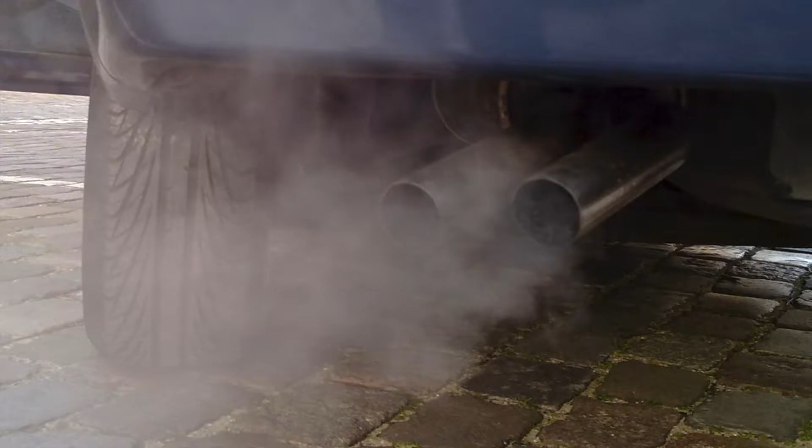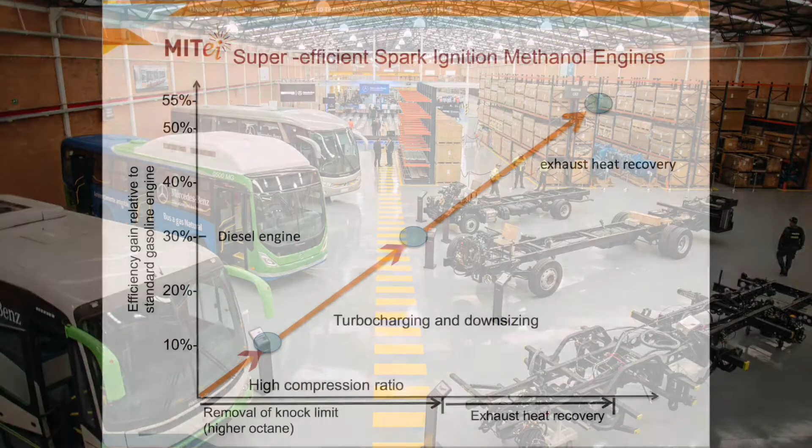Scientists from all over the world are working towards development of new technologies which can increase the efficiency and reduce emissions of engines, and use waste heat recovery for heating and cooling requirements of automobiles. Use of exhaust heat, which accounts for 30 to 40% of fuel energy, has been one of the priorities for many automobile technology developers. If this exhaust heat can be used for meeting the HVAC loads of the automobile space, then the efficiency of the automobile can be enhanced substantially.

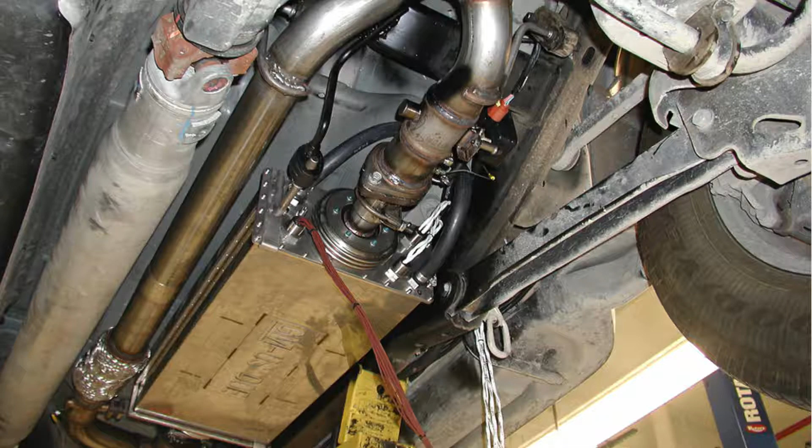Global leading research organizations are engaged in extensive research activities to develop technology to provide HVAC solutions using automotive engine waste heat. But these efforts have not been successful so far due to technological challenges and the complex, dynamic nature of the requirement.

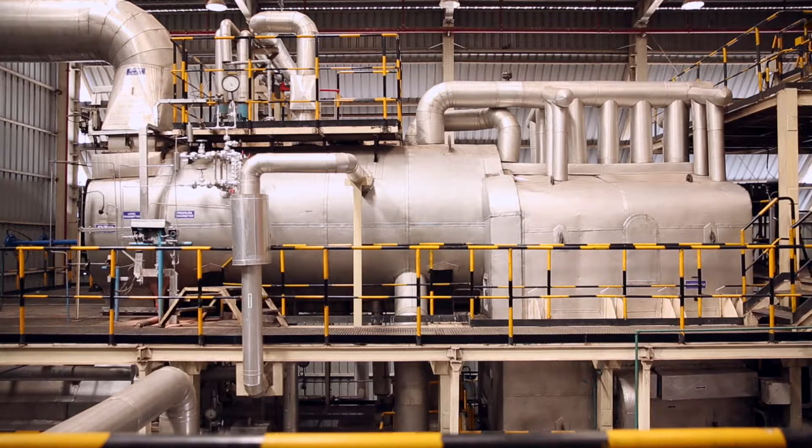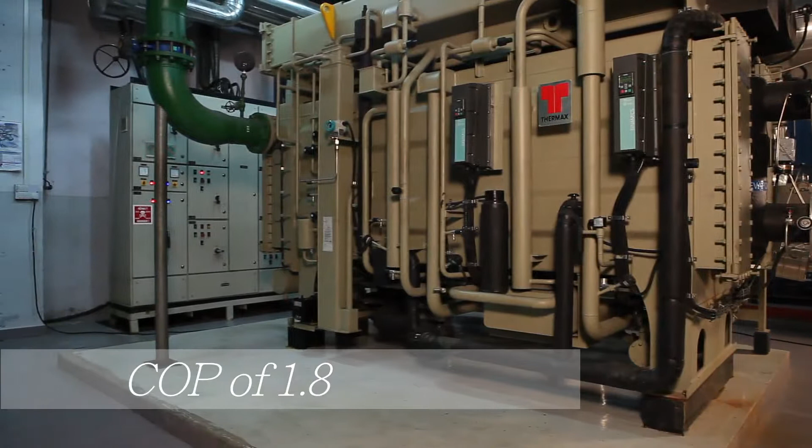Thermax, a globally respected high-performance organization offering sustainable solutions in the field of energy and environment, introduced the world's first and most efficient triple effect absorption chiller with a COP of 1.8, making it the world's most efficient absorption chiller available.

Continuing its legacy in research and innovation, Thermax took a giant stride in the field of vehicle air conditioning systems by developing new technology which uses engine exhaust gas for the operation of the air conditioning unit. The application of this technology can be extended to electric hybrid vehicles as well.

Thermax introduces a patented, thermally activated air conditioning system. This revolutionary product offers benefits like 50% reduction in fuel consumption as compared to vapor compression systems,

50% reduction in emissions due to fuel and conventional refrigerants, lower heat rejection to ambient by absorbing a major part of the heat from vehicle exhaust gases leading to less carbon footprint, and use of natural refrigerant for the air conditioning system.

It frees more power for traction when needed, most like driving in ghats and mountain roads. This product is a portrayal of Thermax's supremacy in engineering and innovation.

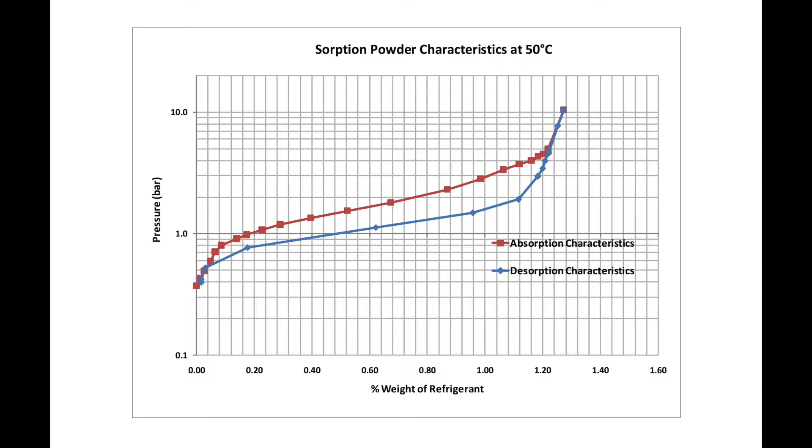The bus HVAC system developed by Thermax is based on the principle of solid sorption heat pump. The sorption material, in the form of powder, has characteristics to absorb and desorb the refrigerant at specific pressure and temperature. Sorption modules in the typical sorption heat pump are identical.

They get into regeneration and cooling mode alternatively. During regeneration mode of operation, exhaust gas from the engine, which is at 300 to 400 degrees Celsius, transfers heat to the sorption module. During this process, the sorption module gets charged.

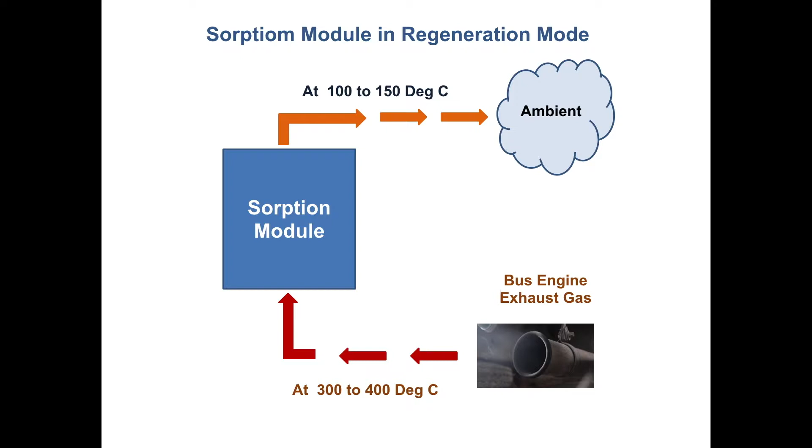Due to transfer of heat to the sorption module, the outlet temperature of the exhaust gas gets reduced to 100 to 150 degrees Celsius, and the cooled exhaust gas is finally rejected to atmosphere. This charged sorption module has the capacity to provide cooling in the cooling mode of operation.

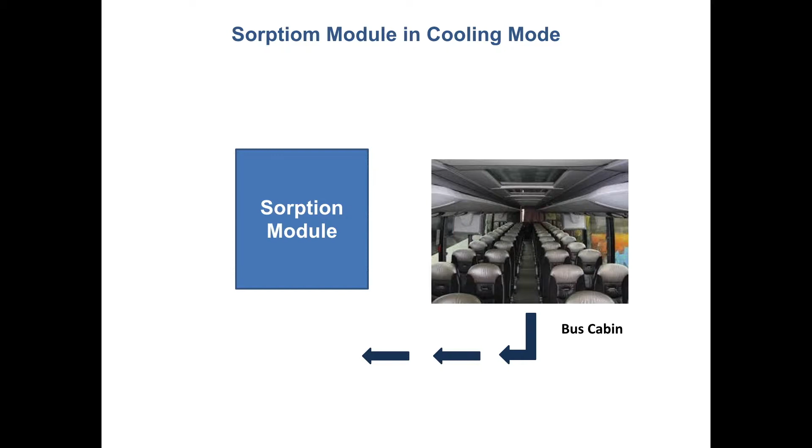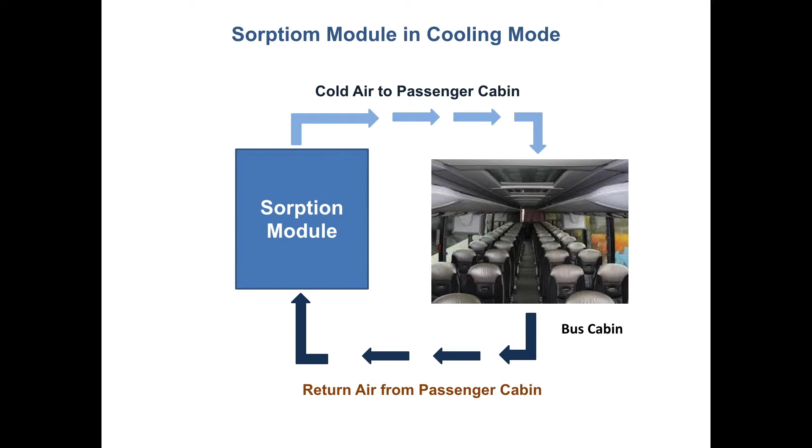In cooling mode of operation, return air from the bus passenger cabin is passed over the sorption module, which was in regeneration mode in the previous cycle. As the return air passes over, the sorption module starts discharging, and in this process, cooling of the return air is achieved. This cool air is supplied to the vehicle air conditioning ducts as supply air.

The journey was not easy, as impediments were inevitable in the path towards every breakthrough.

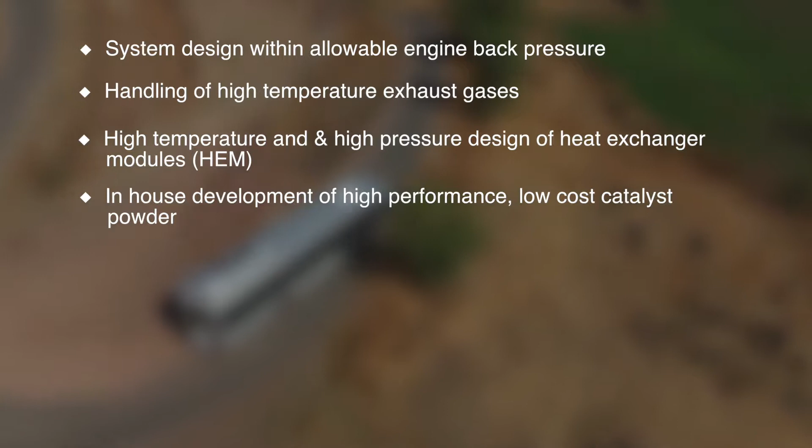The challenges that were addressed during product development are: system design within allowable engine back pressure, handling of high temperature exhaust gases, high temperature and high pressure design of heat exchanger modules (HEM), in-house development of high performance, low-cost catalyst powder, supply of continuous cooling to the passenger cabin considering the intermittent operation of the sorption air conditioning system, limiting system weight to minimize fuel penalty, and system ergonomic design to fit within available space.

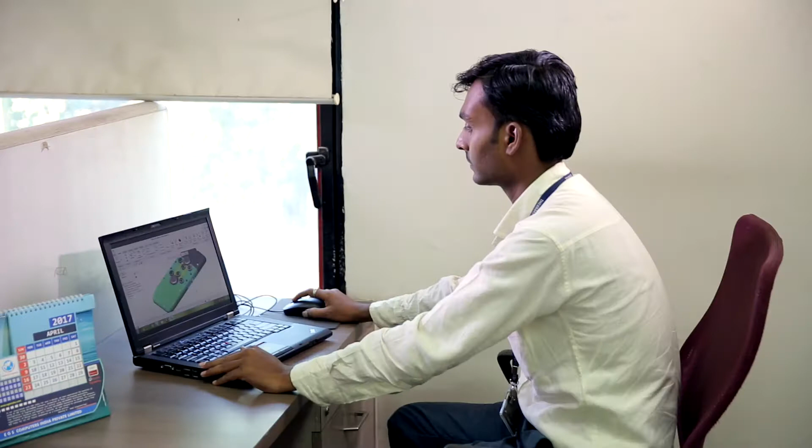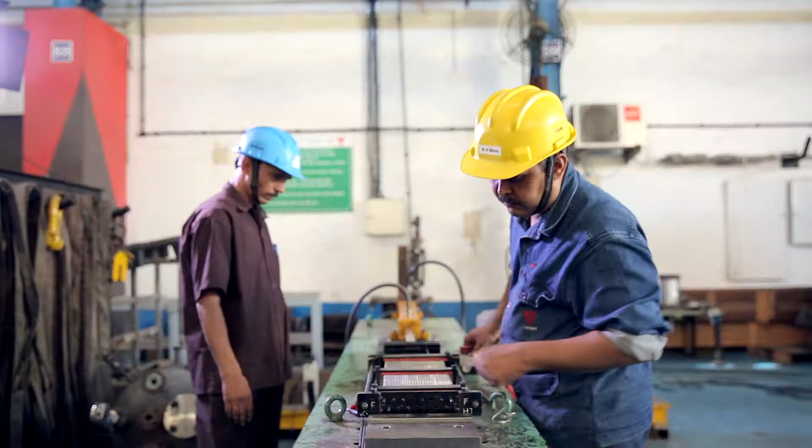Continuous innovation and improvement in technology for a decade, and expertise in the field of combustion, heat and mass transfer, material science, and advanced manufacturing processes has made this long-cherished dream a reality.

Thermax has been working on conversion of exhaust gas into HVAC, especially for automobile applications. Beginning from very fundamental R&D, we have taken this all the way to building a device. Today it gives me great pleasure to announce that we have reached a stage where this product is almost ready to be launched into the commercial market, especially for OEMs and bus manufacturers.

This is the beginning of our great journey in the field of clean technologies, which will give the community reduction in fuel consumption, higher efficiency, reduction in emissions, and therefore we feel that this product will be a product which is world class.

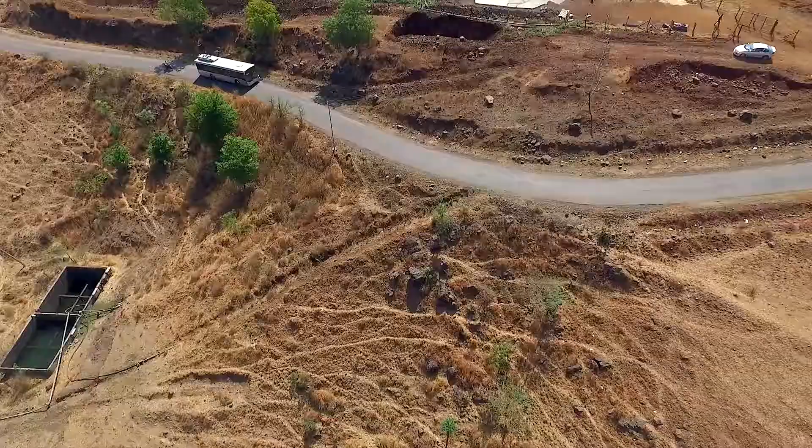In a world that is rapidly moving towards energy conservation and adoption of new green technologies, this path-breaking exhaust gas-driven air conditioning system makes the automotive industry economically more viable and environmentally more sustainable to the world.